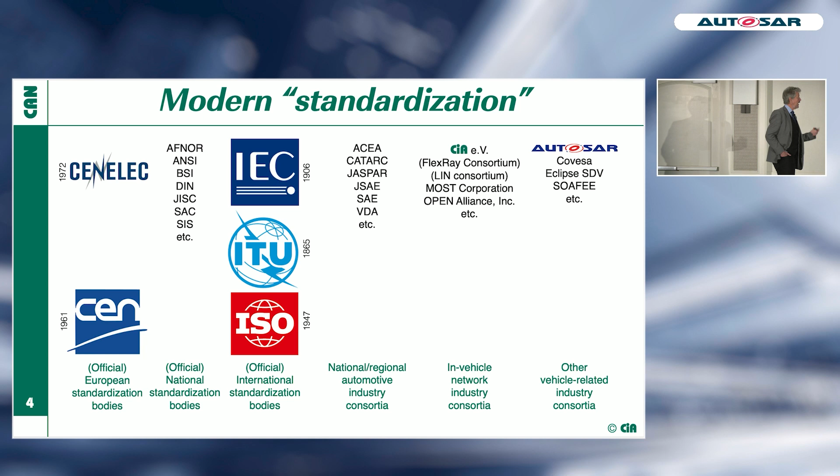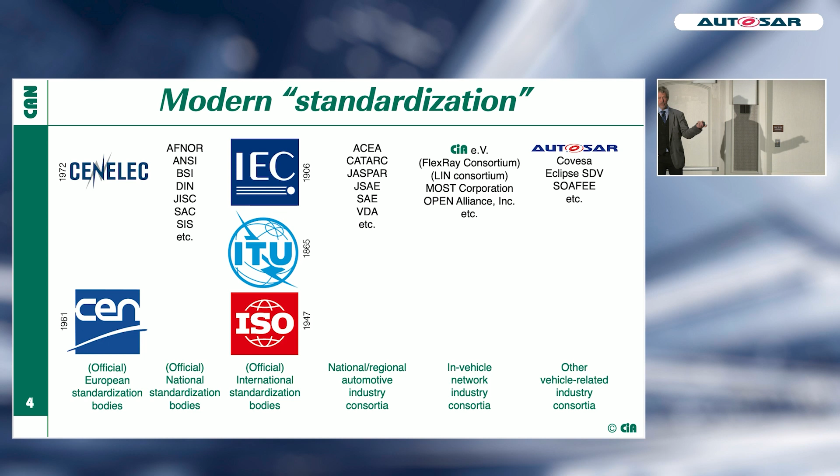But even that is not the complete thing. You see that AUTOSAR, and we learned this morning that Covesa, Eclipse SDV, SOAFEE and others also contribute. If you're missing ASAM, this was intended because there's an alphabetic order, and ASAM would be then in the first place, so it would be polite that AUTOSAR is in the first place. You see that all organizations develop standards by some means, or they make first the code and then the specifications, doesn't matter. At the end, there is somewhere a standard or specification.

This is like in human communication. We have a lot of languages, and we have, so to say, the Babylonian language confusion, because the deliverables from all the different standardization bodies and industry consortia are written by different editing rules. And they use terms which are not harmonized, even not within one organization. This makes a lot of headaches for young engineers if they read documents from different associations. And the models which we're using for communication, for example, are also not harmonized, and we have not defined or specified or described the relations between the different models. So the takeaway is this can lead to misunderstanding and misinterpretations, and we all suffer.

However, there are some ideas how you can overcome this. IEC and ISO have worked together, and they detected this problem a long time ago. They developed, so to say, some harmonized drafting rules. This is nice. If you read an IEC standard or an ISO standard, they have the same structure, the same rules for how to edit those documents. Even the template is the same.

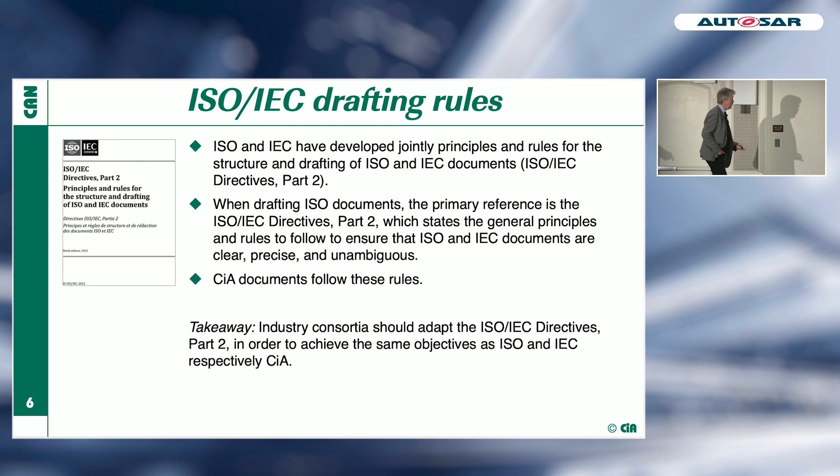One of the most challenging things is that we are using different provisions, or expressions for provisions. So if we all have in our documents requirements, recommendations, permissions, possibilities and capabilities, and external constraints - ISO and IEC have harmonized the allowed verbal forms for that. A requirement should be indicated by shall or shall not. Recommendations should be given by should or should not, permissions by may or may not, possibilities and capabilities by can or cannot, and for external constraints we use must or must not.

One of the challenges is if you are not thinking in English like me. I'm German, and my mother tongue is not English. I have some difficulties using can and may, and so do my colleagues. Most of these standards are supported or driven by German experts, and they mix up can and may. This causes difficulties if you have can and may in the wrong place. So we should stick with these kinds of expressions, and if we do this across all specifications which we release, from whomever, we avoid some misunderstandings and misinterpretations.

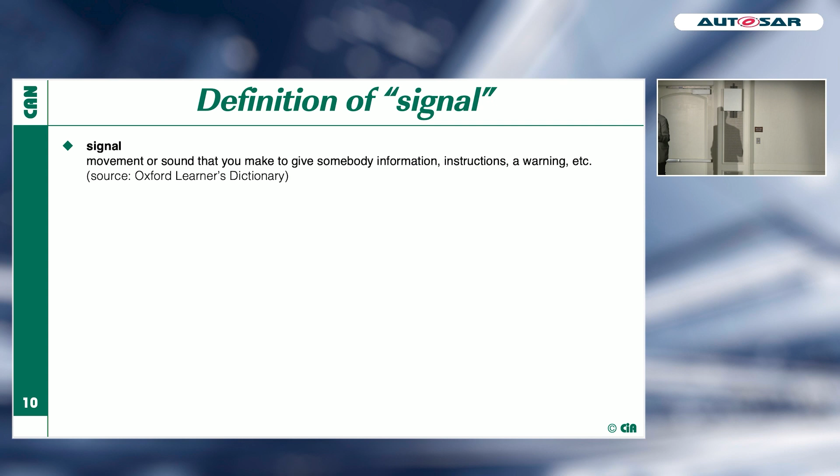If you look to the Oxford Learner's Dictionary, and I have to do so because I'm not a native speaker, I always look to that what is commonly agreed. A signal is a movement or sound that you make to give somebody information, instructions, or a warning, etc. Is this what we are doing? Just answer it by yourself.

And then we're looking to IEC. IEC has, in the database, also a definition of signal. Signal is a physical phenomenon whose presence, absence, or variation is considered as representing information. Is this what the vehicle signal specification is doing? Answer yourself.

Now we're looking to ISO. Oh, here we find something. Signal is an entity consisting of one or more values and which is part of a logical interface. This is a quite new definition from 2021. If you compare these definitions, you will not find a match.

So my recommendation is do not use the term signal for process variable data and process configuration data. That is what we are talking about.

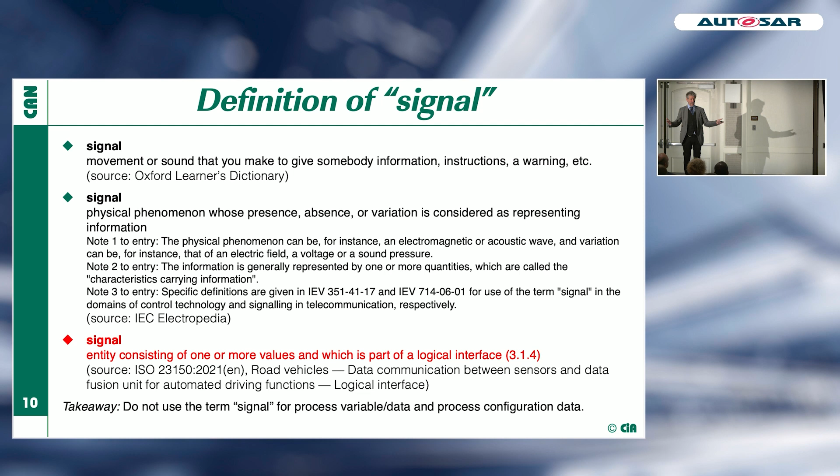This is confusing. And if we are using signal in 20,000 pages from AUTOSAR, and we have also 30,000 pages from CiA, you have several thousands from ISO and IEC, and from all the other organizations, then you are confused at the end because, as we have seen today, there are a lot of different consortia working together with completely different terms or meaning of terms.

Others talking about parameters. Is this better? We can have a look again to the Oxford Learner's Dictionary, what I'm doing always first, because I'm not a native speaker. A parameter is something that decides or limits the way in which something can be done. Is now that what we are called, or what they call the signal? Is this a parameter? Okay, we can look to that and make our own opinion on that.

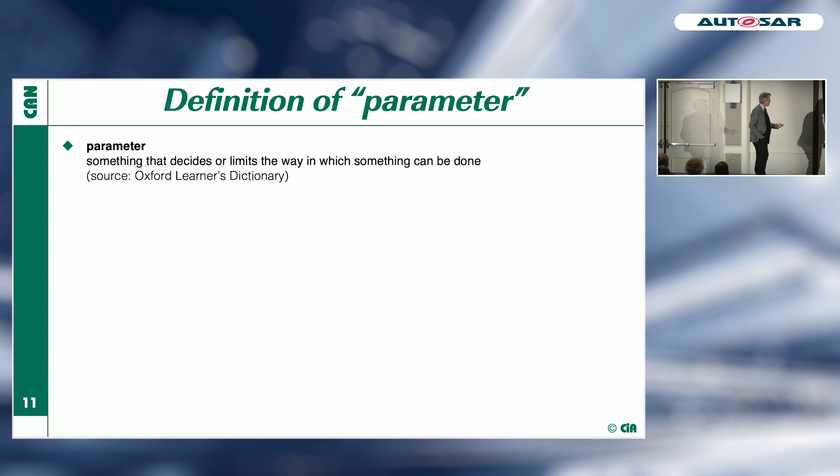Then we're looking to what IEC is saying. A parameter is a variable that is given a constant value for a specified application and can then denote the application. Still, that's not what we call signal in some things and what we mean when we're talking about something given by those applications.

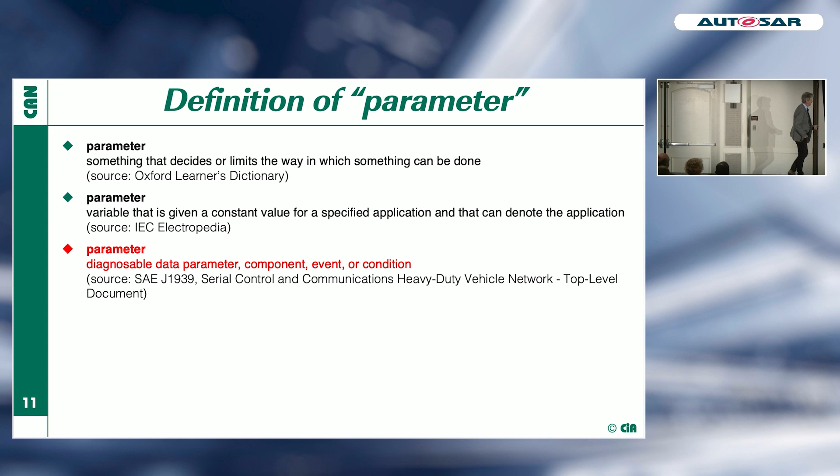Let's have a look to what SAE is saying, because J1939, one of the protocols heavily used in commercial vehicles. Parameter is a diagnosable data parameter, component, event, or condition. Ooh, now I'm confused. I don't know what parameter means. I have 3 different definitions. Doesn't look that good.

So in physical media attachment sublayer standards like ISO 11898-2, we use parameters to specify the transceiver IC. For example, the voltage range and so on. And this is also something different.

So also my recommendation is do not use the term for process variable data and process configuration data. When we discussed this this week earlier in CiA, they said, yes, you're right, the term parameter is not good. But we can't change it. It's already 30 years old. So we use it since 30 years and we have made it wrong.

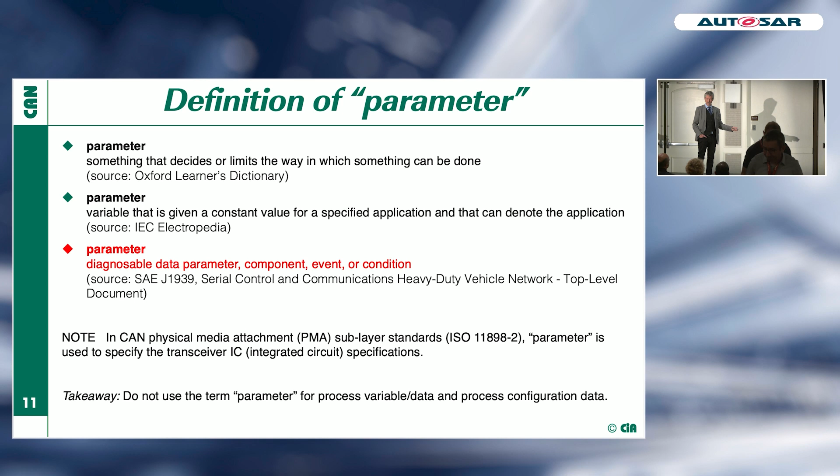Okay, we agreed. We will still use parameter, but we will not use signal in addition in the same document. Because in the digital annex of the CiA specification, there are 1,000 times signal instead of parameter mentioned. They mix it within one document. And if you look now to the other CiA standards for J1939, they have found tons of double use of some of the things where they use signal.

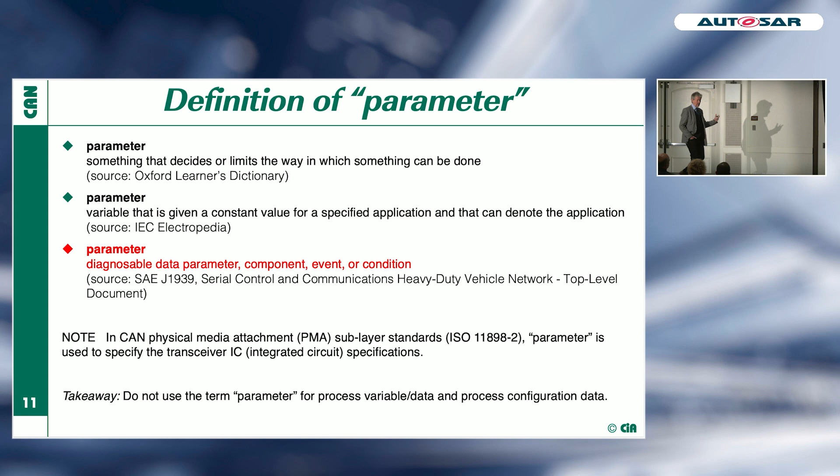And sometimes the term signal is rightly used because they talk about the wireless signal strength. There's signal, okay, it's a physical thing.

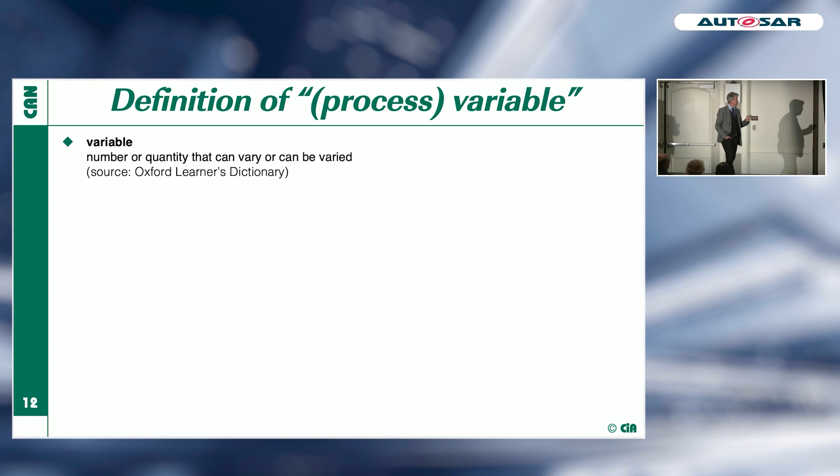We can also look to variable. Maybe this is a better choice. Variable is, according to the Oxford Learner's Dictionary, the number or quantity that can vary or can be varied. It sounds not that bad, even if this is a generic dictionary.

If you're looking to the IEC document database, you see a process variable expressing the state of a process. Comes very close to that what we like to have.

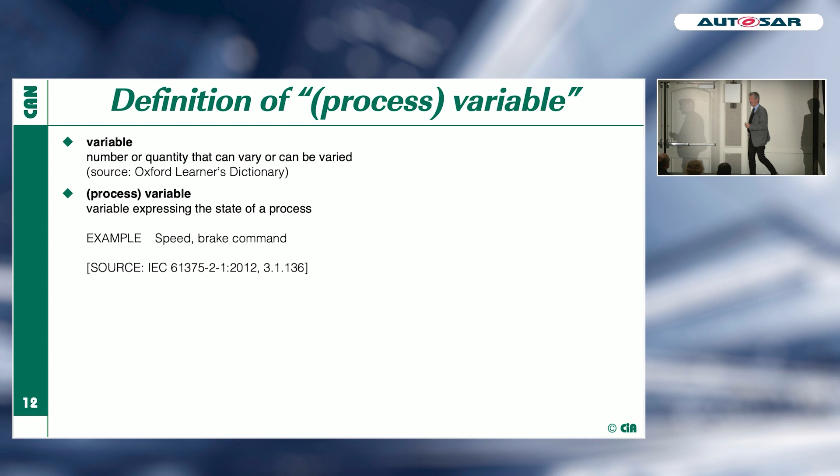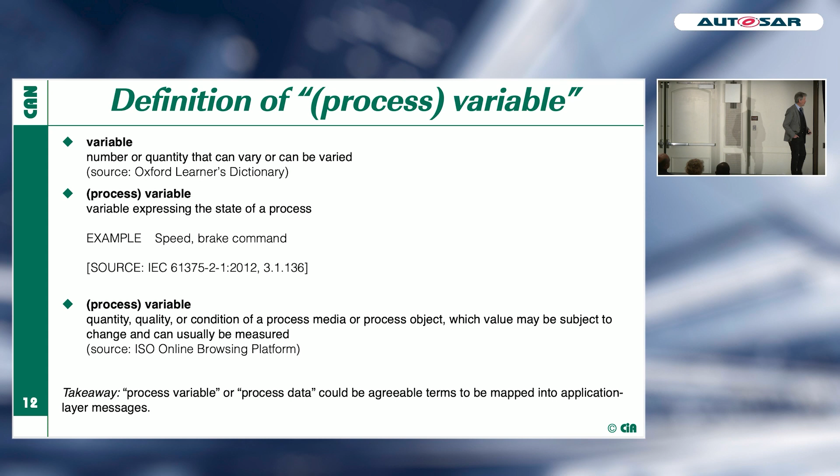On the ISO online browsing platform, you find for process variable: quantity, quality, or condition of a process, media, or process object, which value may be subject to change and can usually be measured. All these three fit quite good together. So my recommendation is, let's use this process variable or process data, and these could be agreeable things which you can map into a message.

Now coming to the models. Models are very nice to have. Mr. Box, one of the scientists talking a lot about models, said models are wrong, but some are useful. This statement is very true. We use them and need them to educate people to have a better understanding of complexity, and we talked a lot about complexity this morning.

Because I'm one of the communication guys and I have connected mainframes and developed software for mainframes in the late 70s, a couple of years ago, we didn't have the open system interconnection model yet, but similar things. I appreciate that this has been given, and one of the authors is Hubert Zimmermann, a French scientist and software engineer. This open system interconnection model is a conceptual model. It doesn't mean you can implement it. We will see how complicated this is.

It provides a common basis for the coordination of communication standards. This is important to understand. This model is useful for me when I'm writing standards, how to structure and partition the specifications. It's not for the software engineers, it's not for the protocol stack implementers. It's just for me, for education purposes, as well as for making the right portions for the different specifications. We will see this later.

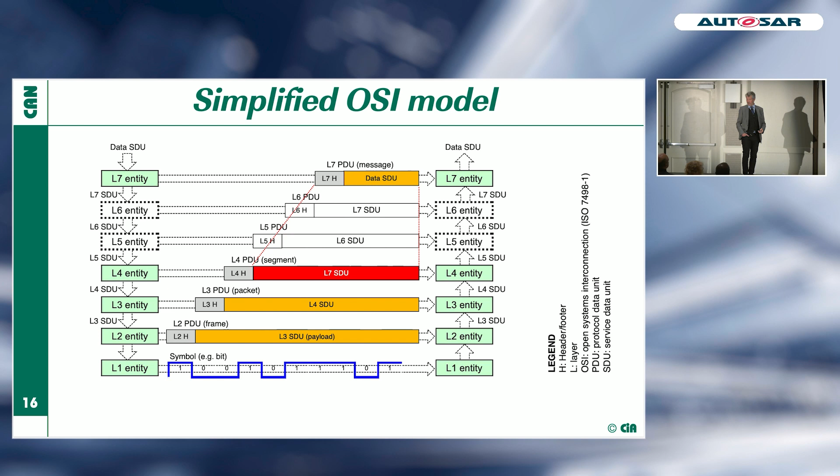Already the fathers of the CAN bus in 1991, when they started the ISO standardization, used such a model - the data link layer and the physical layer - and they subdivided the data link layer, because this was coming from IEEE, from Ethernet, so you have the logical link control and the medium access control. They described the functionality for each of these sublayers, and they also implemented in the CAN chips, in the protocol controller chips, the sublayer for the physical coding.

But there was something remaining that does not fit into the model: the fault confinement and the bus failure management. What's about this? In those days, they didn't know what to do, so they just drew it on the side. You can regard this as something like an add-on function which is not part of the OSI model. So smart they were, these guys.

In the future documents, in the updated documents for CAN, we still have the same structure as in the beginning. We have now identified the different interfaces between the CAN protocol controller and the transceiver chip, so it fits quite well and we can describe anything. So you see that we have forgotten the additional functionality - this was not mentioned anymore.

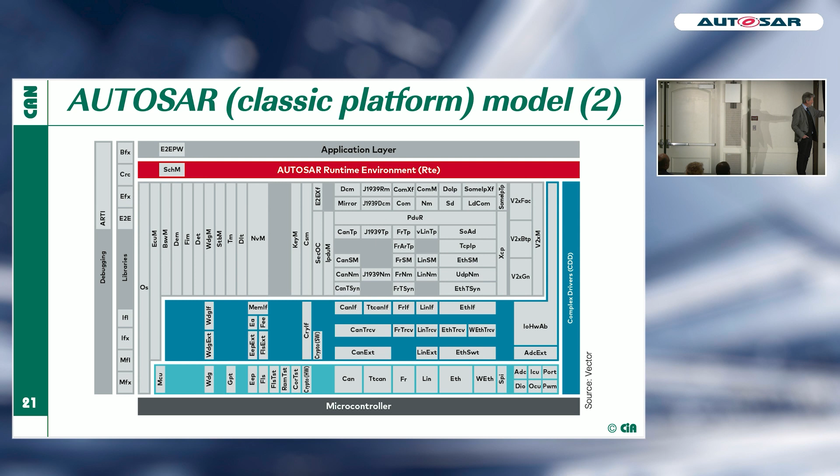I was looking at another same model with different content from another company. I was looking for something related to CAN. You see it on top of that, on the bottom of that. But then I saw also J1939. I was confused. What in the hell are these different modules here? I see the network management, I see the protocol, I see the transport layer.

What has this to do with the application layer? I still think the term application layer is misused. And we should adapt this, or at minimum we should describe in definitions that this is not the application layer of the OSI model. Otherwise people will throw it away and say, I don't understand.

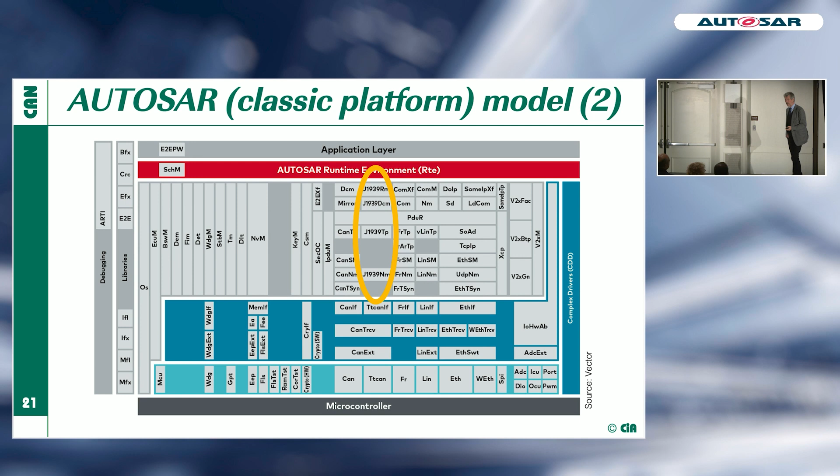But it's even more complicated. If you, I don't know, who is familiar with CAN? Nobody. Oh, a few, okay.

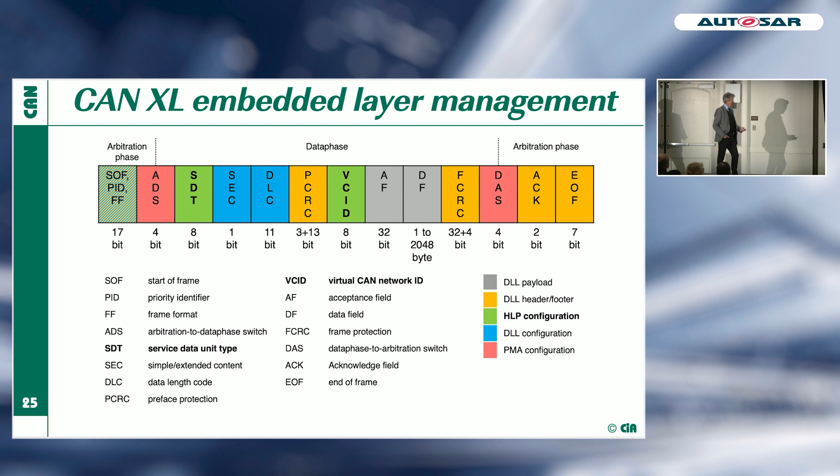So just so you see here, we have the data payload for CAN-XL for example, we have the header, we have the higher layer protocol configuration. Now we can configure, like in Ethernet, the higher layer protocol as well. And we have the data link layer configuration, and we have the physical layer configuration for the transceiver chips. Anything is well described if you do it in that way, and easy to understand.

We try to model this with all the different interfaces, but we are still in the process because most of my members in this working group are still thinking in implementations, because they implement things and don't understand the conceptual model. So we are struggling with that.

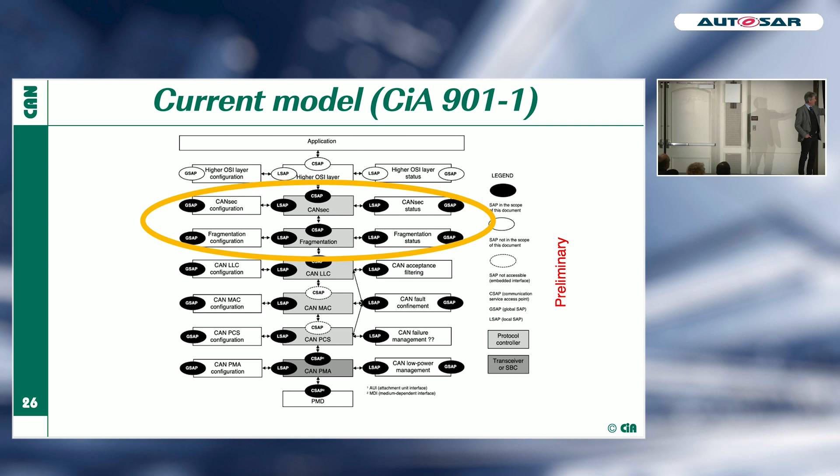Main struggle is, from my point of view, that they put this into the layer architecture of the OSI model. I would put this on the side - this is what we have not finalized because we are working on consensus. So if I'm not in favor of this, then we still discuss.

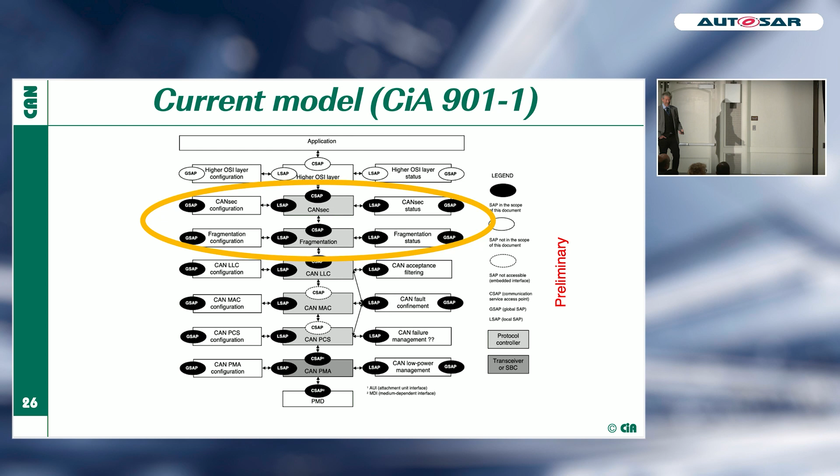Summary: all standard bodies and industrial consortia aim to deliver high-quality documents when and where the market needs them - quite clear, both in terms of technical content and ease of use. And for ease of use, we have to harmonize terminology and we have to harmonize models.

These documents are usually used globally and are translated into many languages. Consistency in writing style and tone also allows the user to know how to use them and to have confidence in the quality of their contents. This is very important - we should write our documents not for ourselves, we write them for others. Unfortunately, there are not so many people able to do so, because most are engineers and they think in their technologies - they don't think in the easy to understand.

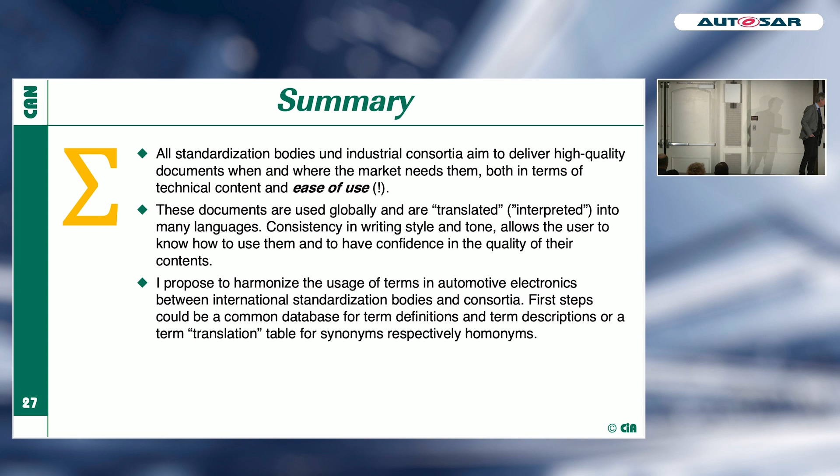Maybe the background which I have as an editor is something of a benefit here. So I propose to harmonize the usage of terms in automotive electronics between international standardization bodies and consortia. I know we can't change that there are tons of documents, but we need at minimum - and this could be the first step - a database of term definitions and term descriptions, or term translation tables for synonymous, respectively homonymous, terms. This is something I invite all the different participants to do.

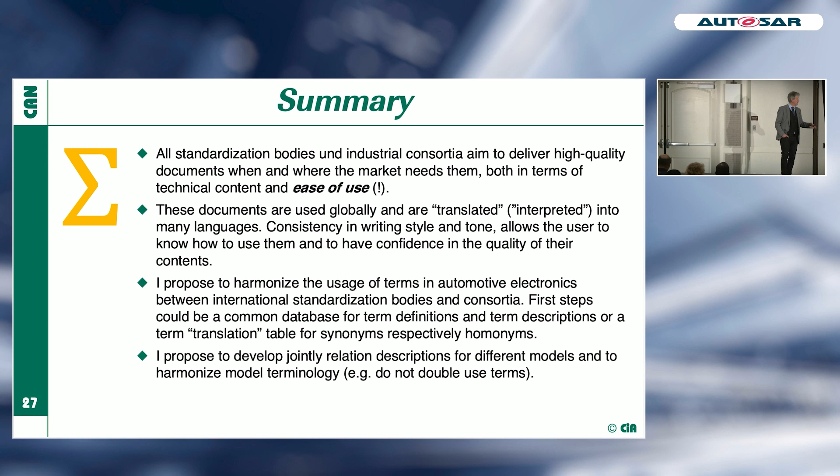With CiA we have quite a good idea to do so, and maybe others will follow this as well. I propose to jointly develop relation descriptions for different models and to harmonize model terminology - so do not use double-use terms. This is also the topic before: don't use 'application layer' if it's not an application layer, or at minimum state that I'm using this term differently.